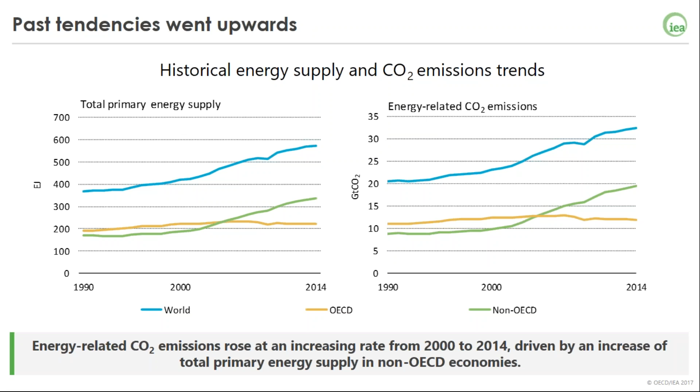As you can see, that's the first time in history that we've seen this decoupling between economic growth and carbon emissions. Now, whether plateauing emissions would be the new normal or an anecdotal fact, we need to decrease energy-related CO2 emissions to meet the climate mitigation goals. So plateauing is not enough. We need to reach net zero emissions in our low carbon scenarios by 2100, or even before 2060 in our more ambitious scenarios, the beyond 2 degrees scenarios.

So the IEA has identified 3 scenarios: the RTS, the reference technology scenario, which is our baseline. It is not a business as usual scenario. It is more ambitious than a business as usual scenario because it already includes the commitment by all countries in the world to cut down greenhouse gas emissions. Then we have the 2 degree scenario that aims at limiting the rise of global temperatures below 2 degrees, and the beyond 2 degree scenario that aims at going beyond.

And what we see is that the contribution of buildings is quite significant because we will need to go from the RTS to the 2DS to reduce the total emissions by 90 gigatons. The share of buildings seems to be smaller than for industry and transport, but from a systemic point of view, it might not be the case because, as you may know, 55% of the electricity is consumed by buildings. So the power sector emissions can indirectly be attributed to buildings. And you know that buildings are getting more and more electrified, so a lot of emissions resulting from power generation can indirectly be attributed to buildings.

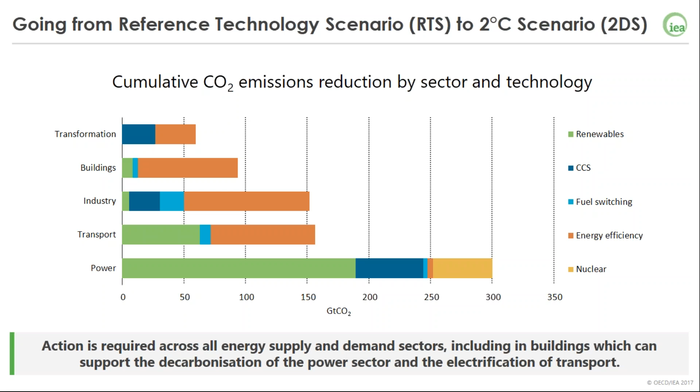So cutting down the energy consumption in buildings is critical to meet climate mitigation goals because it will support the decarbonization of the power sector and allow electrification of other sectors such as transport, which will need electric vehicles and which will consume more energy. So with this in mind, we will make the Global Building Status Report on Mexico.

And we will use the poll. I have one question for you. So the question is, do you think that Mexico is on track to meet climate mitigation goals? I think you have 30 seconds to answer. So you can use the button to vote. If you think that Mexico is on track to meet the energy efficiency goals, to reduce greenhouse gas emissions, reduce the final demand, you can click yes. If you think that it's not on track, you can click no. And if you have no idea or you think that it's globally performing well, you can press maybe.

I don't know how many seconds you have left to vote. 2 seconds? Okay, so 2 seconds left? No. Sorry. About 30 seconds left. 30 seconds left. Okay, it's 1 minute. And,

So it looks like it's very split. A third of you think that they're on track, a third that they are not on track, and a third of you are not sure. And the answer is in Tracking Clean Energy Progress. It's an excerpt of the TCEP publication that highlights that the building sector is underperforming. So buildings are not on track to meet climate mitigation goals, generally.

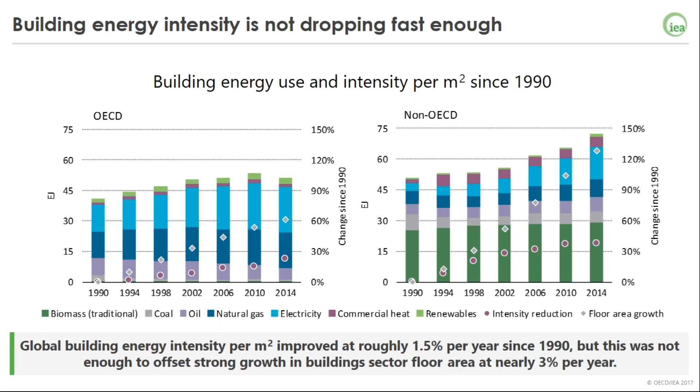Now if we go to Mexico, we see that the picture is quite the same, that intensity improvement remains somewhat a bit shy since 1990, but that floor area grew very much. And on a very positive note, after 2000, we see that energy intensity started to decrease because the purple circles are going up. Nonetheless, they are not catching up with rising floor area here.

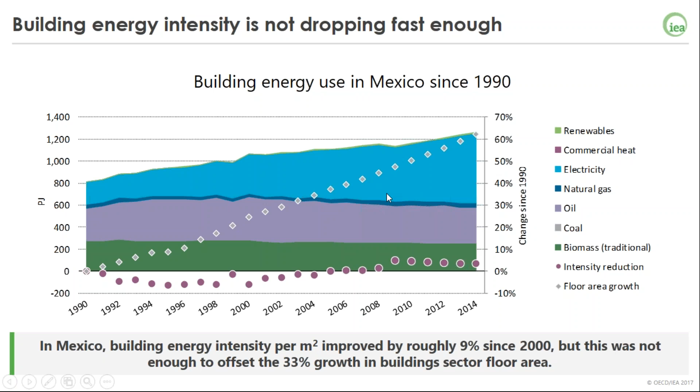On another positive note, we see that the additional energy consumed was made by electricity and not fossil fuels, such as oil. The share of oil is slightly declining and all the additional energy is actually electricity. So this is good news because electricity is a good means to drive high efficiency technologies in the building sector, but we will need to accelerate this transition if we want to be on track for the 2DS.

Now, this graph is a decomposition of Mexican energy demand in buildings with regards to 5 influences pulling up or driving down total final consumption. So population growth in blue, less people per dwelling, larger dwelling surfaces, and other activity effects here, they all resulted in increasing the energy use per square meter and have contributed to increase total final consumption by nearly 900 petajoules here.

And yet, energy efficiency on the bottom only offsets a third of those 900 petajoules. That is approximately 300, a bit more than 300 petajoules. So the net result of this is that total final energy here, the black diamond, has gone up, resulting in 7 exajoules of cumulative energy demand growth since 1990. So just as an order of magnitude, 7 exajoules is 5 times the energy consumed by Mexican buildings in 2014. So we've added 5 times the energy consumed by buildings in a year, in 25 years.

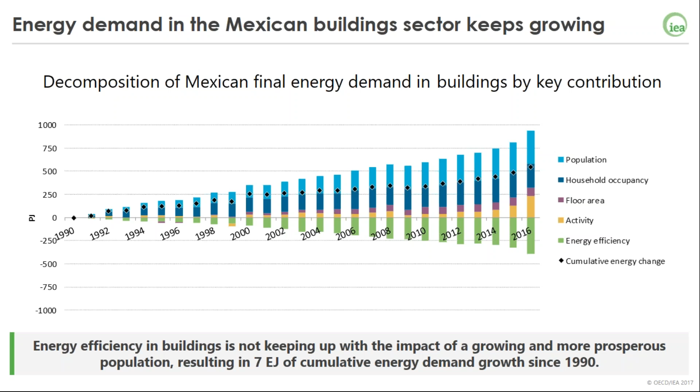Here is the result of our scenarios. So I remind you that the RTS means reference technology scenario. It's our baseline. And we see that for total energy consumption, if we are continuing our trends, meeting our current commitments, but not doing anything more, we are going to add a significant amount of energy, like more than 1 exajoule by 2060. What we also see is the increasing share of electrification. As I told you, it's very important because the power sector is not decarbonized for the moment. It will be in our scenarios, but we're not there yet. So it's important to emphasize the importance of energy efficiency to reduce the constraints on the power sector.

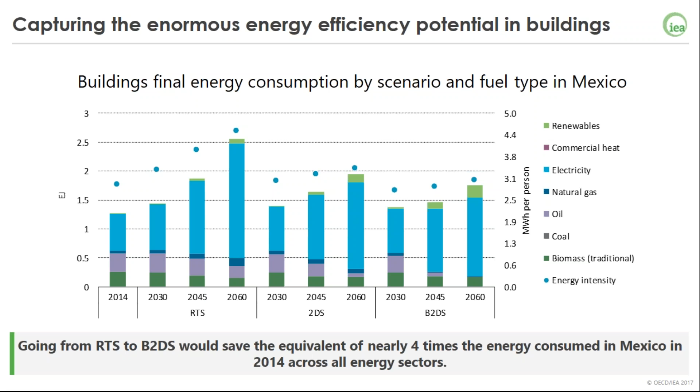So now that we've seen the outlook, we're going to highlight a few energy technology strategies on the envelope performance, on the technology, and the equipment, and how to shift off carbon-intensive building assets. The first thing to notice is that envelope performance is really important to reduce the demand of space heating and space cooling. So in the case of Mexico, it will be space cooling, of course, because this end use will grow at an accelerated rate in the near future. And we see that Mexico is the green on this map.

It means that it has no mandatory energy code for the whole building sector, but only for part of the sector. So it is really critical that all buildings are covered by mandatory energy codes for the whole sector, such as in Europe or in China, for example.

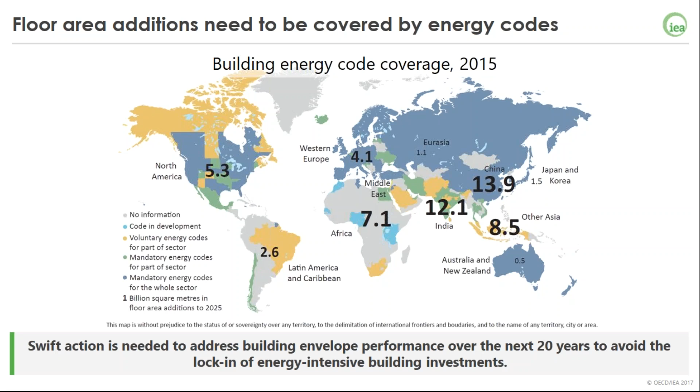But we see that it's pretty much the same in the world, and even in India or in other Asia, Southeast Asia, there's going to be a lot of square meters added on the planet, and these additions are not covered by energy codes yet. So here is a little graph to emphasize the needs of energy codes.

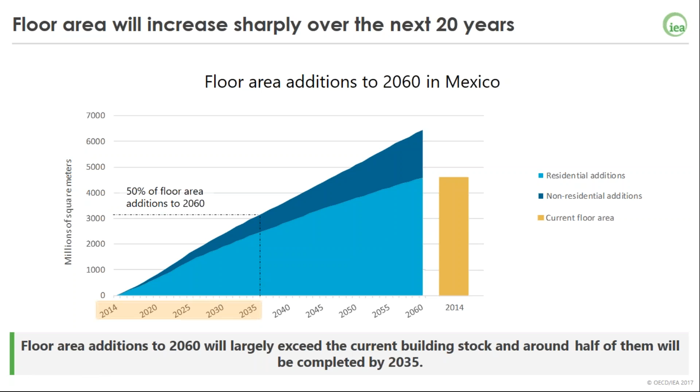So it means that every delay in the actions taken in building code implementation will result in missing all this opportunity. So basically, every action taken after 2035 will only affect half of the building additions. So how do we improve the average building performance intensity? First, there are new constructions.

So for new constructions, we have near zero energy buildings, and we see that the construction rate of these near zero energy buildings, consuming between 30 and 50 kilowatt hours per square meter, is growing very significantly in the 2DS here. So we need to add one

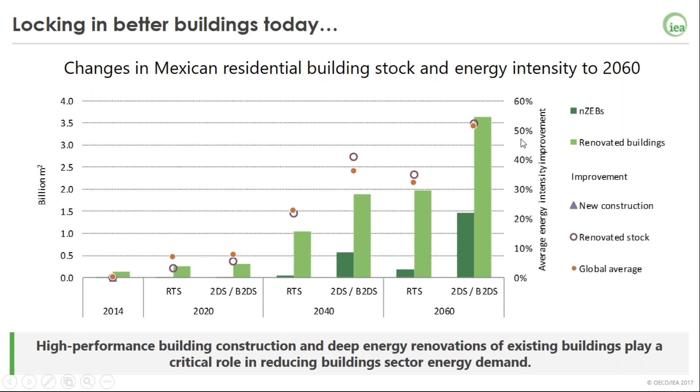to be more ambitious in terms of the performance after retrofit. So basically, from a current average retrofit performance of 15%, we can go up to 30 or 40% for the worst performing buildings to meet the 2DS and the B2DS. And the net result of all these measures in the building IEA model is a net improvement of 50% of the average building envelope performance.

Now, I've already emphasized the need to take the actions urgently, but here's a little graph showing the consequence of a 10-year delay in achieving building envelope objectives in Mexico. So it's just delaying the actions by 10 years and catching up later. And we see that the energy loss because of this delay is not very huge on an annual basis. But because building lifetime is very long, we will have this loss on the whole building lifetime, so maybe 60 or 80 years.

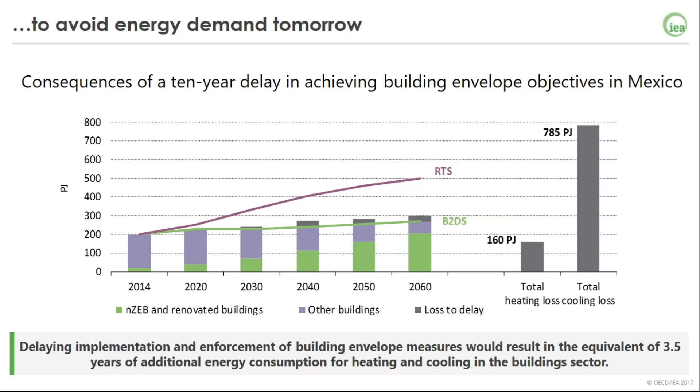So it results in 160 petajoules of heating loss and 785 petajoules of cooling loss. So it's more than 3.5 years of additional energy consumption for heating and cooling. So if you delay the implementation by 10 years, you have 3.5 years of additional consumption to meet. So now that I've finished with the envelope, I will leave the floor to John Dulac for the equipment.

Okay, thank you, Thibault. So Thibault's presented a broad overview of the global objectives as well as some of the critical issues that we see in Mexico, where some of the analysis that we did for ETP 2017 this year was looking at particularly some of the pivotal turning points within the global building sector, as well as you can see in the examples from Mexico with regards to energy technology, priorities, and strategies.

Obviously, in countries like Mexico, as well as many of the rapidly emerging economies in Southeast Asia, and even in Africa, cooling demand is in particular one of the critical pieces of energy demand that we see happening in the future. Now, as Thibault mentioned, there is, of course, the critical role for building envelopes, where the average intensity of building envelopes, either through new building construction or through renovation of existing buildings, plays a key role in the total energy consumption demanded for thermal comfort within the building with respect to heating and cooling equipment.

Something that we also considered this year with respect to this is how efficient equipment in buildings is. And one of the examples that you see here before you was looking at the net available efficiency of different room air conditioners, so split air conditioners across some of the critical cooling markets globally, and what this means with respect to increased energy demand that we see happening in the future.

So if you look across the board here, whether it be developed markets or even developing markets with existing minimum energy performance standards, for example, Mexico, China, the United States, India, or even markets that have lower efficiency potentials with respect to available goods in the market, regardless of the situation, what we see is that in fact globally the average market-weighted performance of split package air conditioners is in fact very similar across the critical cooling markets at roughly a coefficient of performance of about 3.

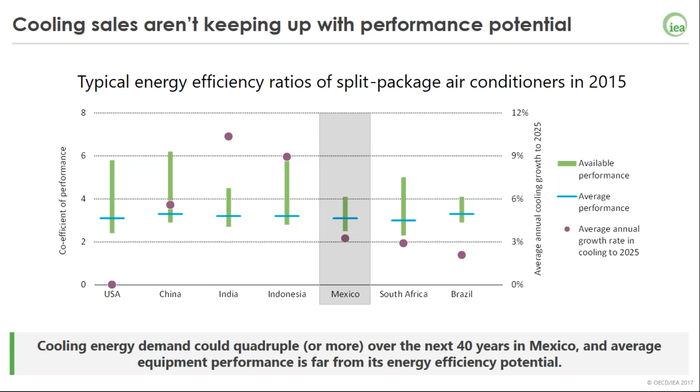A second piece that Thibault mentioned that is new to this year's ETP 2017 analysis is looking at some of the strategies forward with respect to building sector energy consumption and decarbonization, particularly with regards to the Paris Agreement that set new ambitions to go below 2 degrees. So as Thibault mentioned, on your left here you can see our reference technology scenario, where in countries like Mexico we would continue to see a very much continued business as usual pathway, particularly with regards to heating equipment in buildings, which would mean continued use, for example, of oil boilers, some growth in gas boilers, less efficient electric technologies, for example, electric resistance water heaters, and some small deployment of efficient biomass and solar thermal technologies.

In a 2-degree scenario, our recommendations for the last 10 years of ETP have been looking at moving towards more efficient, lower carbon technologies, including, of course, technologies like heat pumps for hot water heating and for cooling in buildings, as well as solar thermal technologies to provide better and lower carbon hot water demand in buildings, and those strategies very much looked at a progressive deployment of clean and energy efficient technologies over the next 40 years.

However, within the framework of a below 2 degrees or beyond 2 degrees scenario, as Thibault mentioned, the period in which we would need to decarbonize the building sector is rapidly accelerated from roughly 2100 to somewhere between 2050 and 2060. And as part of that new commitment, there would be a considerable rupture from not only a business as usual perspective, but also from our 2-degree scenario, in which we would see the need to much more rapidly deploy energy efficiency opportunities and low carbon technology opportunities in the building sector, particularly, as Thibault mentioned, in support of decarbonizing upstream power generation.

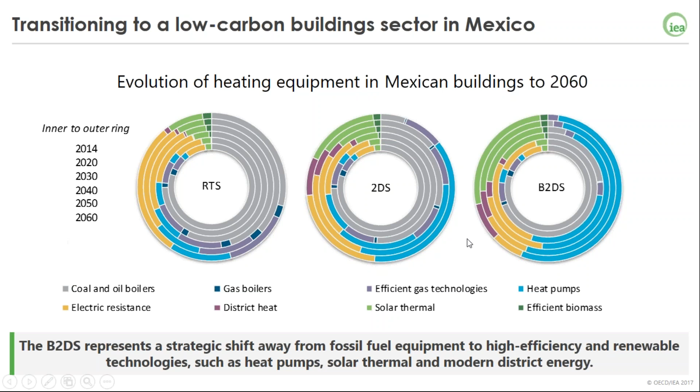And so what you see here in the right graph, looking at the beyond 2-degree scenario, is in fact what we see as a real opportunity in Mexico to significantly deploy high-performance technologies like heat pumps for heating and cooling demand in buildings, where again we would see a need to significantly increase the improvement of room air conditioners and air conditioning units in Mexico, but also for an end use that is not typically considered within the building framework, which is hot water heating, which is a critical energy demand in Mexico, particularly with regards to traditional use of biomass. And as part of this clean energy transition, what we would expect would be a significant movement towards high-performance technologies like hot water production using heat pump technologies, and as you can see as well, using solar thermal technologies in our beyond 2-degree scenario.

Now, historically, as Thibault mentioned, we have seen some progress with regards to efficient equipment in buildings, where globally, as of 2015 and going into 2016, we saw significant uptake of LED lighting technologies, so light-emitting diodes, with performances that are significantly higher than traditional incandescent halogens and even compact fluorescent lamps that have been deployed in recent years.

If we look forward as part of our beyond 2 degree scenario, what we would see again is a rapid uptake of those technologies, where I want to pause to emphasize that, again, as with cooling equipment, most of the technologies that we are discussing in our ETP scenarios are in fact technologies that are already available and typically cost-effective over the life cycle of the product in most markets.

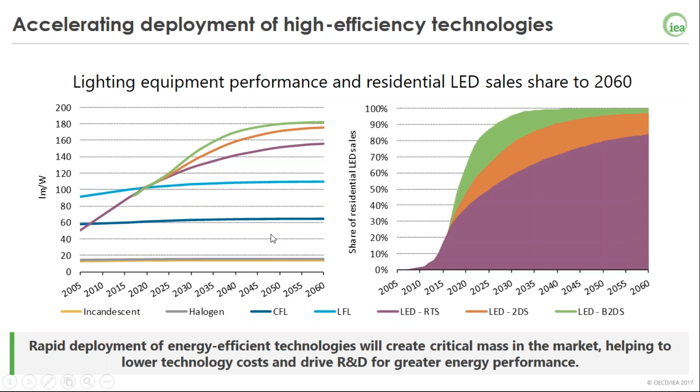So with that said, we see a significant opportunity, and again I emphasize using technologies that we know are typically available in most markets today, but that we have a pathway to forge in terms of achieving those sustainable building ambitions between now and 2030 and beyond. In this section, we'll discuss some of the energy savings potentials and strategies for achieving those ambitions, and then what this would mean in terms of policy implications in moving markets forward.

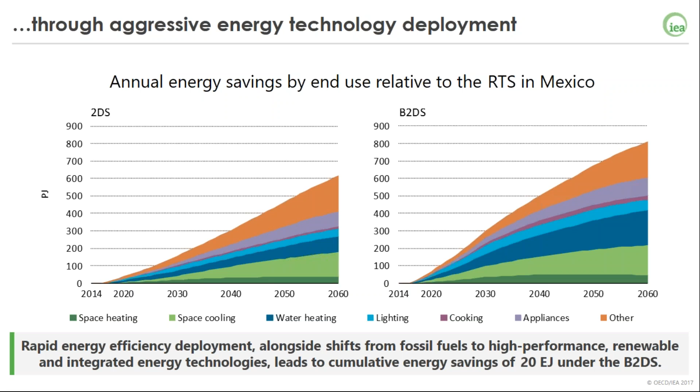I point out, particularly with regards to the previous slide that Thibault noted, that the bulk of this growth, whether it be in the RTS or the Beyond 2DS, is electricity demand across the Mexican building sector, and that we see a real opportunity here to support decarbonization and, in particular, more affordable electricity generation in Mexico by using those energy efficiency opportunities in the building sector.

So, how do we get there? In terms of technology strategies and recommendations in the ETP publication, which you can find online if you visit our website at iea.org/ETP2017, we first and foremost start with the recommendation of whole building packages with respect to building envelopes.

Part of this, as Thibault mentioned, is looking at high performance envelopes in terms of new construction, as well as deep energy renovations of existing buildings. This can be through combinations of technologies, some of which are advanced technologies, and others which would be more conventional or traditional building practices, particularly in the case of hot climates like Mexico.

So to give some examples, this could be the use of high-performance insulation products for new construction. It could be using double-pane windows with low emissivity films to reduce solar gain in buildings, particularly in hot countries like Mexico. And it could also be using traditional technologies, particularly with respect to the adobe style in Mexico and other parts of Latin America, taking advantage of things like shading on buildings, to reduce the heat gain, and in particular to reduce the amount of cooling demand in buildings.

We also at the same time would want to see solutions for equipment in buildings, whether it be heating and cooling, lighting and appliances, or even cooking equipment across the building sector.

Starting first again with respect to the building's envelope, we would want to see much more efficient and low carbon deployment technologies with respect to heating and cooling in the building sector. Part of this can be simple solutions, for example, installing better thermal controls and distributions in buildings, which can include not only the heating equipment, but also ventilation, as well as the distribution of heating and cooling in buildings.

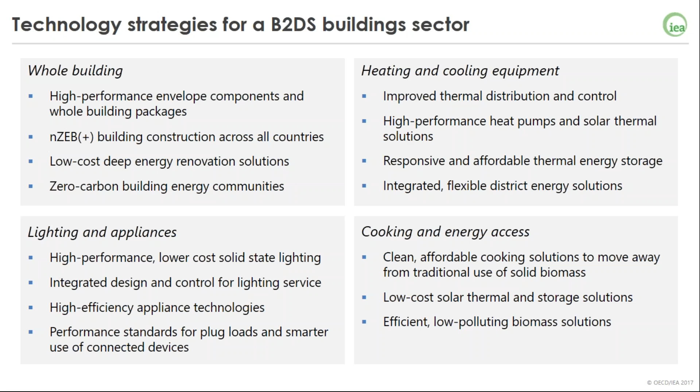If we were to move forward with this, looking again at what Thibault mentioned for historical perspectives on the decomposition of energy demand in the building sector, we see a real opportunity to rapidly improve the overall energy intensity and demand of the building sector with respect to the reference technology scenario.

So again, this is a complicated figure, but to give you a sense of what we're showing here, in the reference technology scenario, we would consider essentially an extension of historical trends where growth in population, buildings floor area, fewer persons per household, greater consumption of energy consuming equipment, for example, would all drive significant additional growth in energy demand, and the energy efficiency opportunities that we would be tapping into would in fact not be enough to offset that considerable growth in energy demand, meaning, as you can see in the diamonds here, that overall consumption of energy in Mexican buildings would continue to increase.

In a beyond 2 degree scenario, we would still see the same growth in population, floor area, household size, appliance ownership, under the assumption that we would not impact those drivers within the building sector or reduce the energy service provision to buildings. But using energy efficiency opportunities, as we discussed in this webinar, we could significantly reduce the overall growth in building energy demand, thus limiting, in particular, the onus of electricity generation from the building sector energy demand.

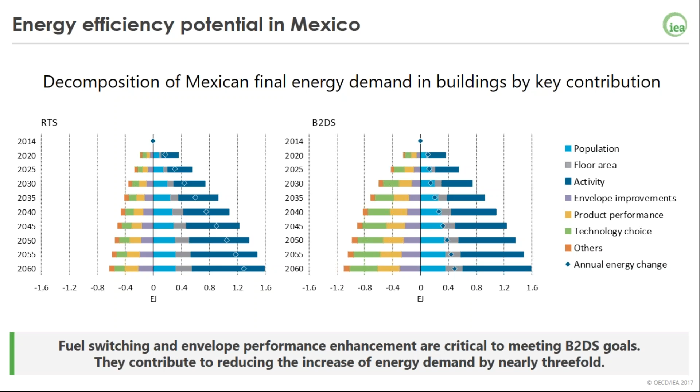Finally, in terms of emissions, looking again at our objectives of achieving a 2 degree trajectory globally in terms of average annual temperature rise, or of course the new commitments of the Paris Agreement of going beyond 2 degrees, what we see globally here is that energy efficiency opportunities in buildings play a significant role in reducing building-related emissions.

To break this down and to explain to you where this is coming from, what you see here in color, including the shaded portions here, going from the RTS in 2060 down to the midpoint of this graph, are in fact energy efficiency improvements coming from better building envelopes, both in terms of new construction and building renovation, in terms of technology performance, as well as in terms of technology choice, again moving towards more efficient and lower carbon energy technologies in the building sector.

What's not so evident in this graph is the role that energy efficiency plays relative to upstream power generation. And so what we've provided you with here is information in the hash portion of this graph of what are indirect emissions from the building sector. That is to say, these emissions are not directly produced by buildings. Rather, those emissions are produced upstream from electricity consumption in buildings, and what we see, in fact, is that they play a significant role in the total buildings-related emissions reductions to 2060.

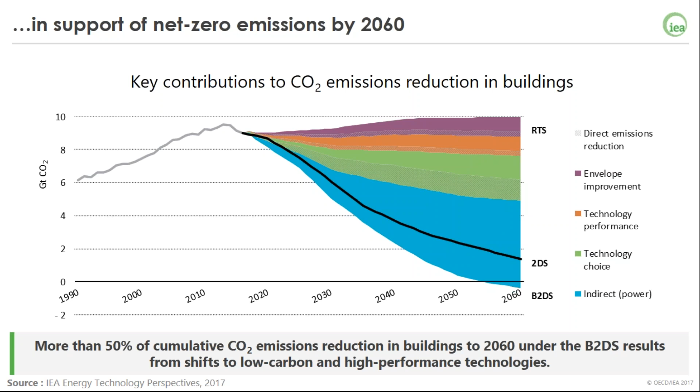So with that, some of the policy strategies that we see to conclude in moving forward for the building sector are that we need to move, as Thibault mentioned, to mandatory building energy codes, particularly for new construction in rapidly emerging economies and in regions where we see significant growth in the future, but also for existing buildings, which in many regions continue to be ignored, but that play a significant role in the energy efficiency potential and decarbonization of the building sector moving forward.

We also know that we have significant leverage in terms of existing practices, whether they be policy or building construction techniques, that need to be shared across countries. And then in particular, we need to do a better job at capacity building and training to make sure that those that are working in partnership, and especially in local areas, on actual building construction projects or building renovation projects have the right tools at hand and understand the energy technology strategies to improve building envelope intensities.

Part of this also means putting forward financing schemes and market incentives to help drive energy efficiency investments in the building sector, where again we know that typically speaking, consumers often make decisions based on upfront costs and not on the long-term return on investment relative to those energy efficiency improvements.

As part of such, we see that there's a real need globally to transition to zero carbon buildings, and as part of this package, particularly with respect to the building envelope, we need a long-term strategic vision for the energy transition. Part of this means setting forward policies that clearly outline the ambitions for the building sector to give long-term vision to the market as to what the expectations will be, not just for tomorrow, but moving forward towards 2030, 2050, 2060, and beyond. Part of this means signaling the market, particularly with respect to the beyond 2 degree scenario, as to what we see as appropriate technologies in the building sector, especially with regard to fossil fuel use in buildings.